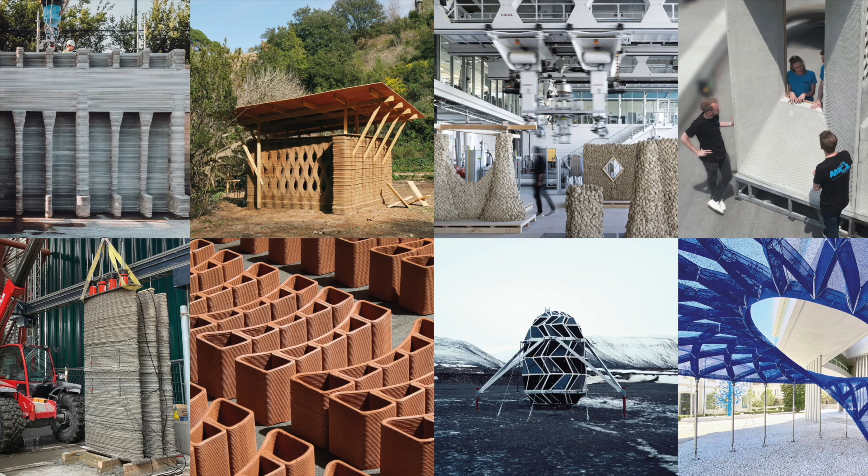Colleague. In 2020, she co-chaired FABRICATE together with Jane Burry, who, by the way, also is here. Jenny is a core member of our community and really a stellar point in keeping our research discourse astute, precise, and critical. Jenny is Arthur L. and Isabel B. Wiesenberger Professor of Architecture at the Department of Architecture in Cornell University, where she runs the Sabin Design Lab, which is in deep connection with her Jenny Sabin studio.

Her work examines how design and emerging technologies can drive new directions for the 21st century architectural practice. She investigates the intersections of architecture and science and applies insights and theories from biology and mathematics to the design of material structures, creating a new ideation of how computational design, data visualization, and digital fabrication can be brought together. She's a key voice in our architectural research community.

She has won multiple esteemed grants from the U.S. National Science Foundation, the National Academy of Engineering, and the Graham Foundation. She is now Vice President, former President of the ACADIA Association. She's the recipient of very important fellowships, including the Pew Arts Fellowship, the Knights Fellowship, and the Architectural League Prize. She has exhibited in leading venues, and her work is included in collections of the Cooper Hewitt, the Smithsonian Design Museum, the Centre Pompidou, and the Frac Center.

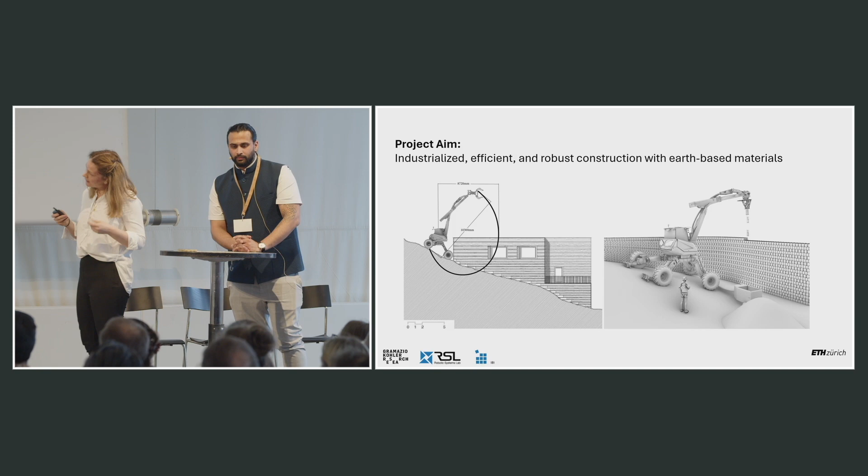So the project was really based on this aim of taking earth-based construction and industrializing it, pushing it to full scale, and pushing it on site. So the goal is to use an autonomous construction machine as one of the ultimate platforms to enable a breakthrough at scale, but also to push the construction speed and the throughput so that we can really facilitate a low cost that will enable us to enter the market.

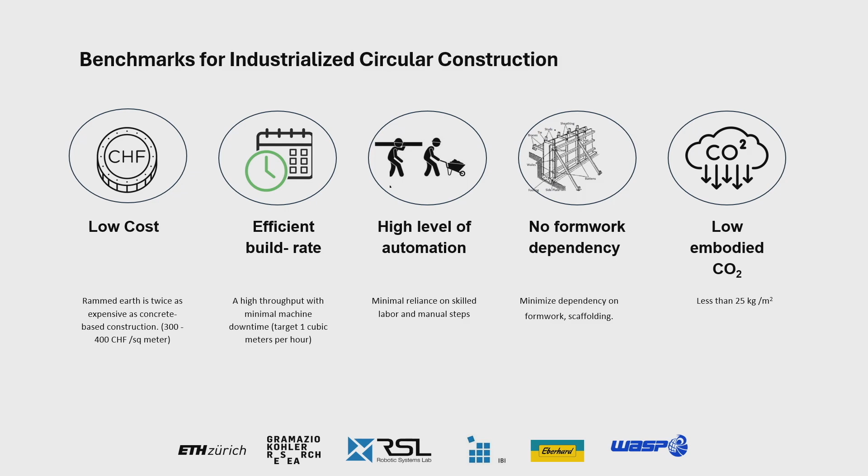So the benchmarks for industrialized construction include: we must consider costs, we have to consider an efficient build rate, we have to consider the parallelization of tasks, we need a high level of automation, especially in Western contexts where the cost of labor is expensive, no formwork dependency, and we need to really think about the additives and whether they compromise the embodied CO2 and the circularity. So we wrote this grant 3 or 4 years ago, so it's super exciting to see it come to fruition now.

We were very lucky to hire Kunal from IAAC to gain a lot of knowledge from 8 years of earth-based building methods. And Ananya is also here in the audience, so if you see him, feel free to ask some questions. But we work also with the Chair for Sustainable Construction. They help us with the material development, and also the Robotic Systems Lab on autonomous robotic systems. WASP has been an industry collaborator on extrusion systems, and with a local construction partner, we're working on a circular mix design and supply chain.

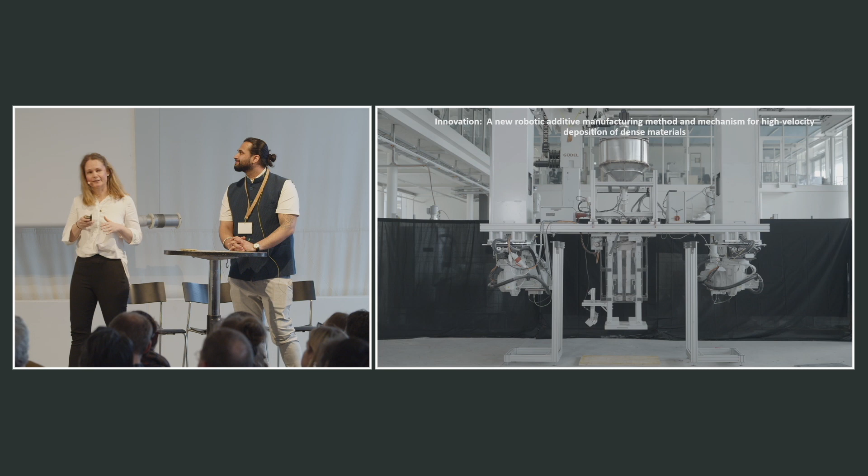So this is maybe not as loud as it could be, but this is our new additive manufacturing method. So we have developed over the last 3 years a completely custom machine. It's obviously very high payload, but basically it takes very high dense material, it portions it, and then it shoots it with a very high velocity. So the velocity is 10 meters per second. And by shooting it at a very high velocity and controlling the velocity, we can actually enable bonding between the parts, even when the part starts with a very, very high yield stress beyond what is pumpable.

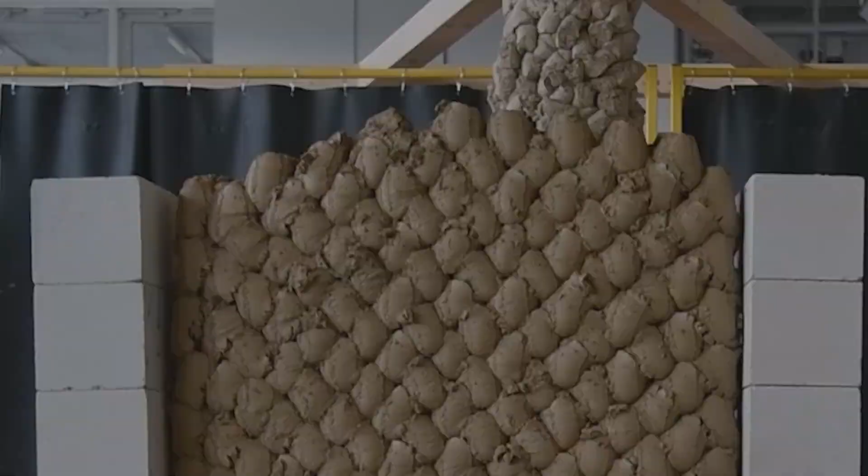And because we're starting with the material in a higher yield stress, and we're building with it, actually what's very exciting is that we have a very high stable height buildup, and we don't need to stop for construction pauses to wait for green strength development. So we've been able to achieve very thin structures, so 0.1 meters in thickness, that are 1.85 meters, that are only built in a few-hour construction session.

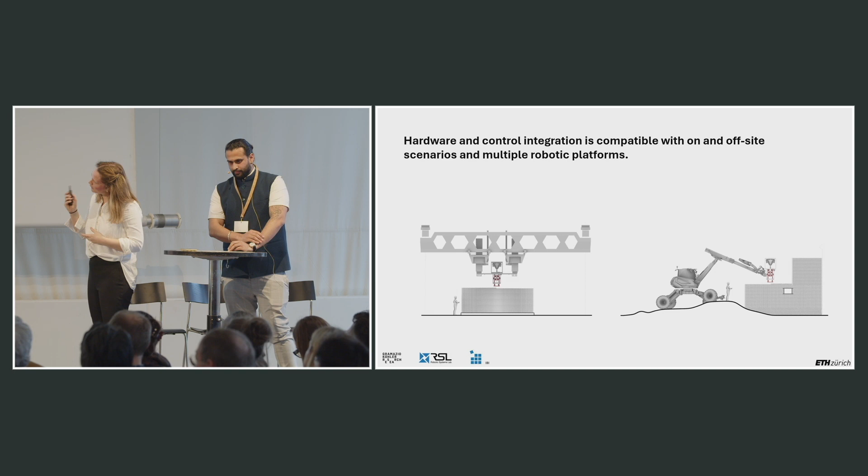And second, for the goal, we really want to develop our whole fabrication process for transitioning it from an off-site fabrication environment, which is very structured, which enables prefabrication, and transition the whole hardware, control, and software to an on-site construction platform. So we're developing everything so that we can ultimately transition it to an on-site autonomous excavator. So now I'm going to pass it over to Kunal, who's going to give you some insight into the paper and the off-site prefabrication. Thank you, Lauren.

So to assess this factory on the fly setup that we have in the prefab off-site scenario, the software or the design and the fabrication workflow was introduced in a studio project at MAS at ETH. There's a small link that you could maybe scan and get more information about. And the focus topic of this studio project was to make embedded timber frames to create architectural openings in impact-printed structures.

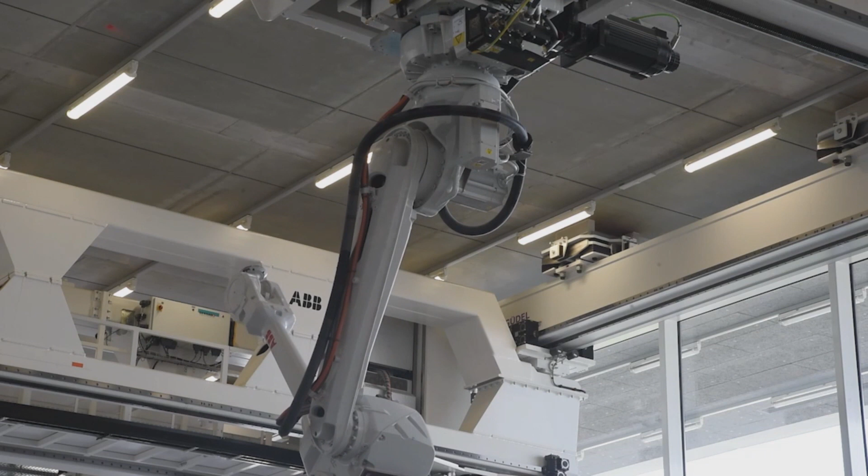As a given, the students were introduced to a set of hardware and software tools developed by the research team. They were introduced to our experimental setup on the prefab configuration, where it has the assembly that you just saw in the video before. It comprises a hopper-based extruder and has a portioning system and then a shooting mechanism which shoots the parts at a very high velocity to have a compaction on impact and hence impact printing. So what we see here is that this end effector then is mounted on a bridge-like structure, which is then manipulated in Cartesian space, synchronously programmed for 2 robotic platforms in a gantry system.

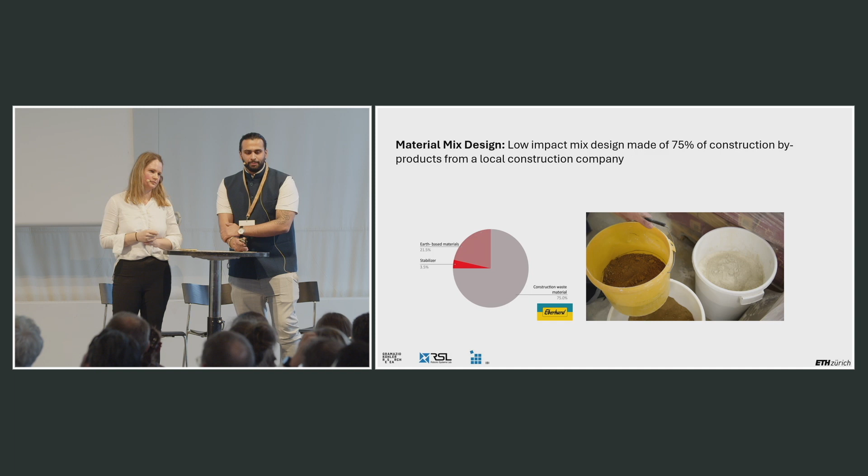The material mix which was used for the studio was a low impact mix developed by the Chair of Sustainable Construction, which comprised mainly 75% of construction byproduct material donated by Eberhard, which is a local construction company in Switzerland. And it's topped up with earth-based materials such as sand aggregates to take the compressive loads, and also clay to enhance the adhesive properties for the process, and minimal amounts of stabilizer.

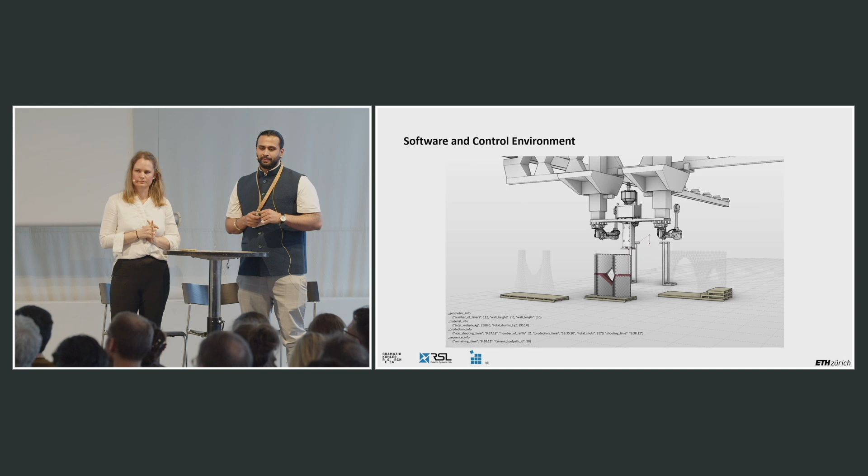To create a robust pipeline from design to fabrication, the students were also introduced to an object-oriented design library, which discretized intended geometries into impact printable trajectories for the operation. And as an addition, the control environment also included, you can see here on the bottom, an insight on the production information. So it gives you a quantitative estimate of materials to be mixed during construction and to plan the logistics around the fabrication process.

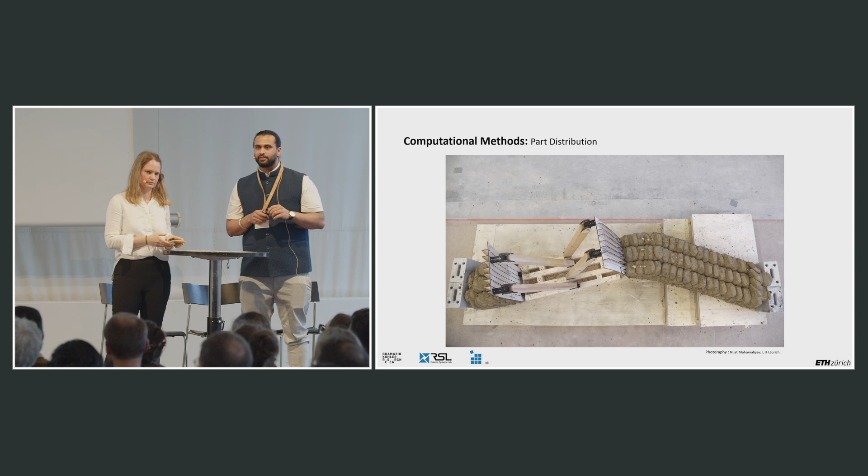So one of the main challenges for the computation methods is to achieve a consistent overlap between the parts, to have an even volumetric buildup, since it's a remote deposition process. Here, maybe it's a bit more evident, but this is a picture showing a part in 3 phases. The one on the left you see is a part when it's extruded, the one in the middle when it's compressed for the shooting process, and the one on the right is when it's shot, which leaves an elliptical footprint, which makes it difficult to achieve this consistent overlap over curvilinear trajectories.

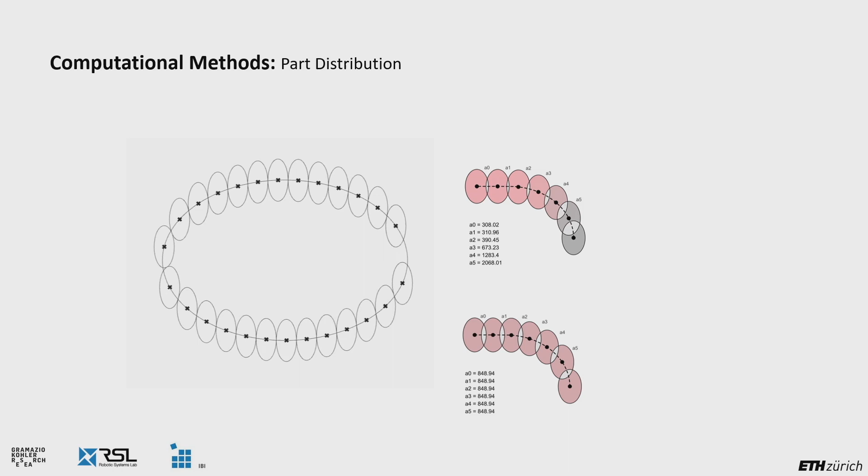Here is the image from the final fabrication of these volumes. It's a column and a wall typology, which uses this algorithm, and which is capped with a roofing element to show the even volumetric buildup achieved with this process.

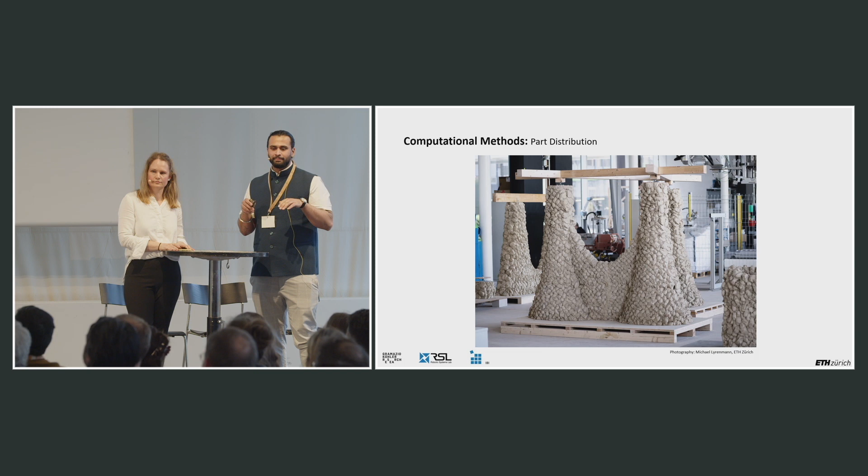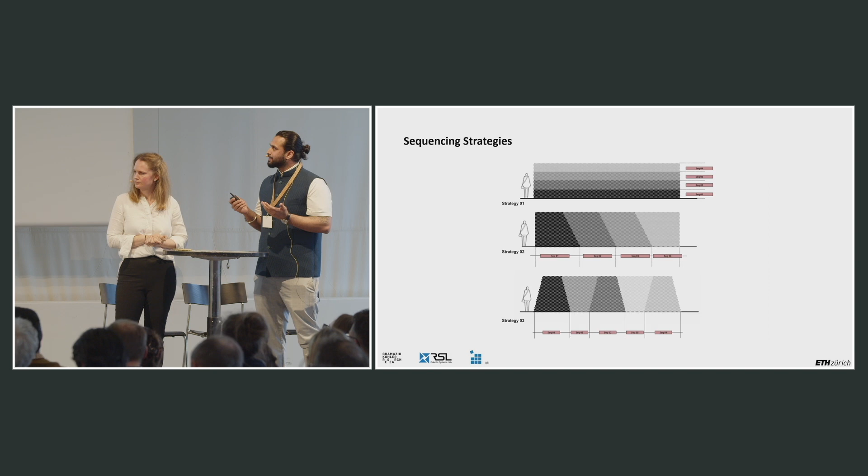Now, in contrast to layer-based additive manufacturing, impact printing allows you to deposit material from a distance. So through testing, we've tried to deposit materials from ranges from 20 centimeters to 2 meters, and this actually allows us a huge opportunity to embed other subsystems into construction, such as windows, doors. What you see on the screen is like a replica of different strategies, that you could sequence one geometry in different ways, depending on a lot of factors related to material curing and construction sequence.

So while it offers these opportunities, there are also some challenges. To embed timber frames, one of the challenges is the placement of the frame, the other one being the adhesion between the frame and the deposited material, and the last being stability because of the impact forces of the process.

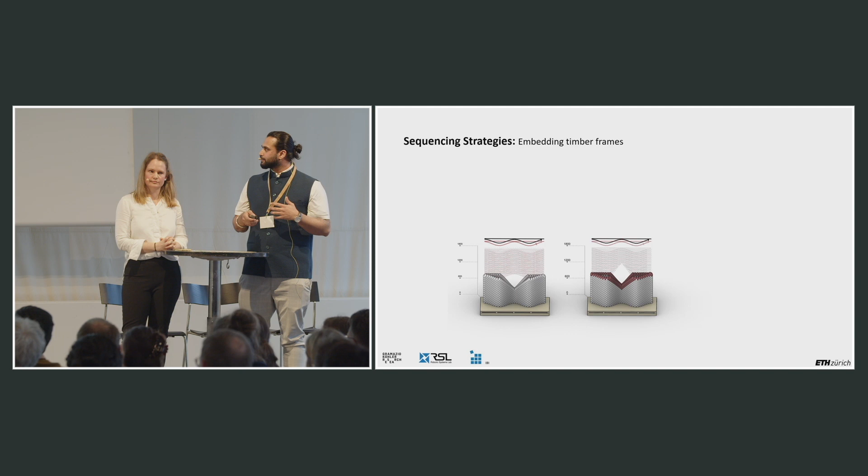So initially, there was a void created in the impact printed volume to physically guide the embedding of the timber frame. And since in most scenarios you cannot construct the whole volume at once, there were separate sequences to always have a fresh layer deposition between the external element and the deposited parts. And then once the timber is embedded, to change the sequence to have a deposition pattern from outside to in to create stability during construction.

Can I say something? Okay.

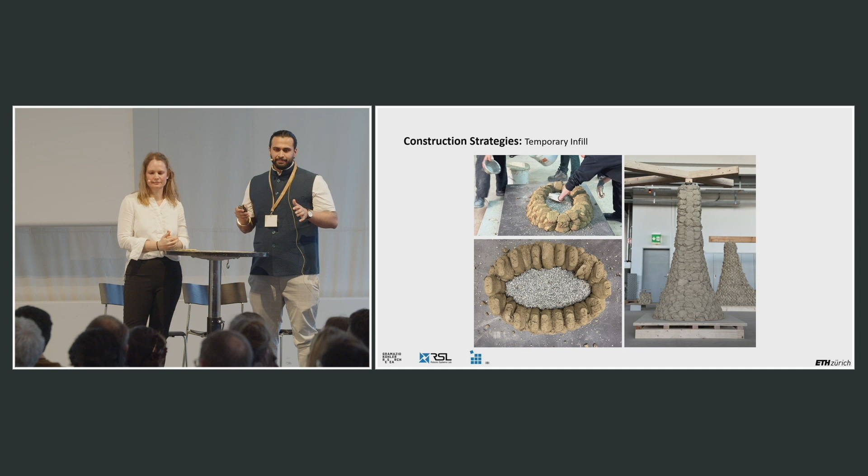The global stability is a factor to consider because of the impact forces, and to tackle this, there were strategies which were developed, described much better in the paper, such as temporary infills to facilitate tapered structures or cantilevered structures, which could be removed after. And with the help of these construction strategies and computation tools, we were able to construct all of these prototypes, which shows potential for impact printing to be a valid AM method for earth-based materials.

We can also think back to our original goals, which is targeting a very efficient construction rate. Right now, our cycle time per part is around 7 seconds. We target to increase that to around 2 seconds per part, which is about 1 cubic meter per hour. And right now, we're actually not always depositing material. We really need to basically develop a complete material processing and feeding pipeline. So this is in our next steps.

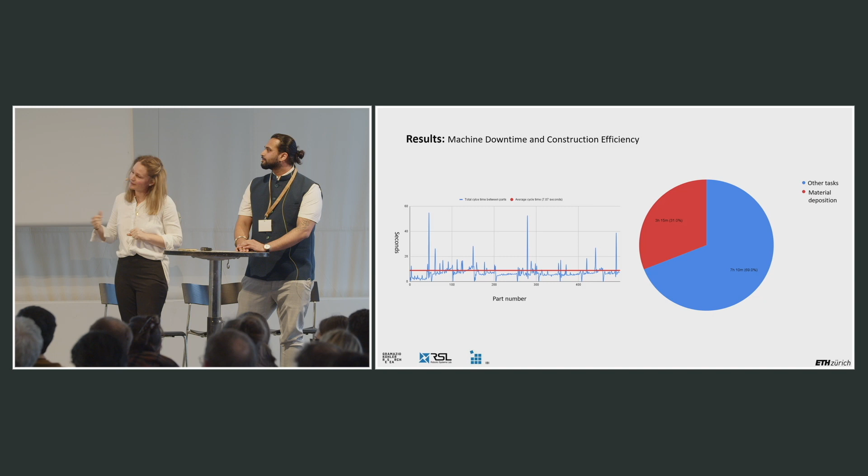And Kunal is going to talk a little bit more about some of the other research outside of the scope of the paper. Yeah, as means to commercialization, we are also looking into robotic finishing strategies. In particular, for my PhD, I'm looking at a novel tamping process, which makes use of the extended workability of the earth-based materials, so that you could tamp it in place, evenly redistribute the material, and have a flat finish.

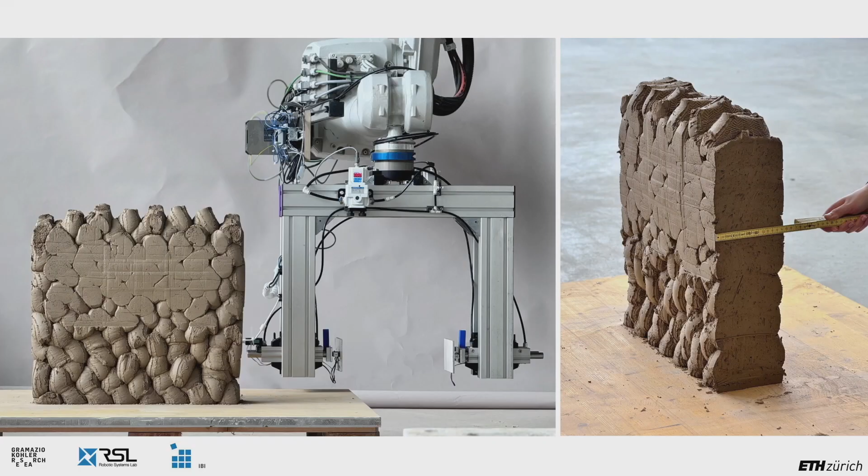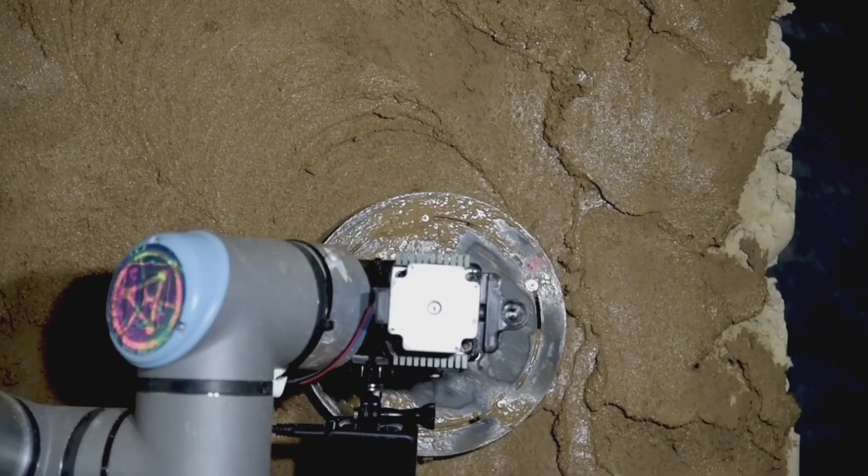Here are some pictures from the first tests, proving that this could work, and then the plan for the next few months is to scale this up. And also in the context of MAS, with two of our master's thesis students, we developed another robotic surface finishing method. First, we acquire the surface geometry because it's very textured, and then we use a compliant robotic surface finishing tool to apply a clay-based plaster on the surface.

And this gives us a lot of processing possibilities because we can basically take a very cheap infill material, and we can use a very fine, high-quality material on the outside, and we can manipulate the vapor permeability or the durability by changing the surface coating. And finally, we're super excited to announce that we integrated our tool also on the autonomous excavator, which was developed by our partners, the Robotic Systems Lab.

We've successfully built a 3-meter tall demonstrator. We're really excited to publish it and release it in the future. And we've also gotten SNSF bridge funding to actually commercialize and take it into industry. So we're moving towards establishing a startup. ChatGPT has not been very successful for us in coming up with a startup name.

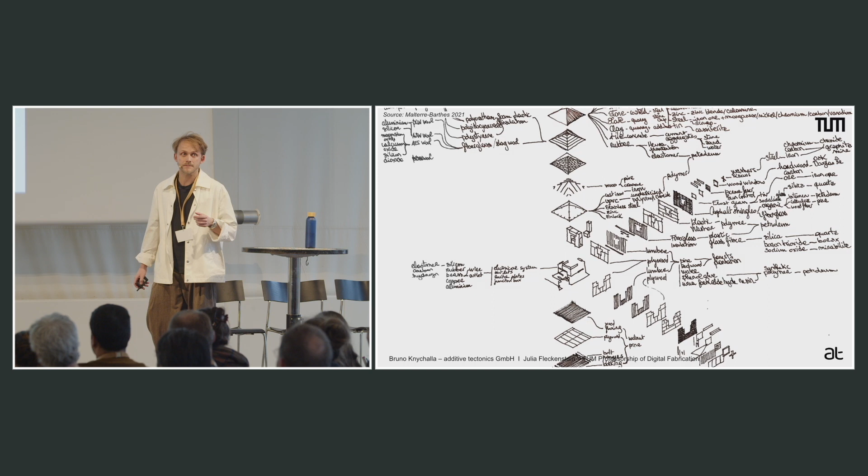Currently, we are dealing with the increase of advanced building systems to achieve ever-improving standards of comfort and living in buildings. But those buildings usually rely on a very complex array of materials that are mostly glued together. Research at the TU Munich has already shown that you can also do this in a monolithic and monomaterial approach. This is an example called Einfach bauen by Professor Florian Nagler. It works in different materials.

The prototypical house that you see here, its envelope is composed of one monolithic material, which is here infra lightweight concrete. The lifespan is based basically on this monomaterial, and it's easily recyclable because we just use one material, nothing is glued together, and it's done in one construction process. But to specifically integrate certain building functions can be tough in a building system like this.

Pioneer architects like Marcel Breuer already envisioned multifunctional hybrid facade systems, building envelopes. In this image, you can see the IBM Research Center in La Gaude, France, which is the base model of our research. Breuer synthesized mainly three building functions: building services, installation, and passive solar control in one modular piece.

But because of the fabrication technologies of that time, of course, these building elements are all self-similar, or basically the same. So we envision a strategy where we can make one simply built, einfach bauen, monolithic building system, but in a multifunctional way. And we think by using additive manufacturing, we can integrate multiple functions into a monomaterial system and basically increase the lifespan, making it more durable and easier to disassemble.

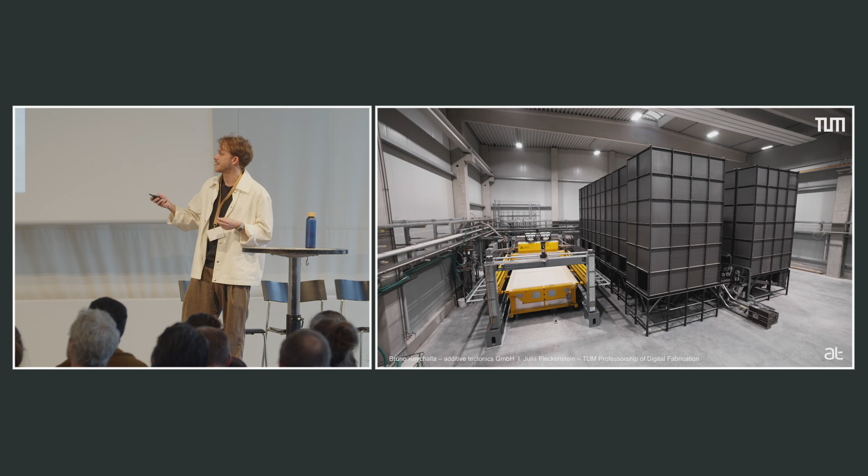So aggregate and binder are in the powder bed, and just the activator is jetted. Here you see it. While in binder jetting, you basically jet the binder. So this is our big future factory at Additive Tectonics. Here we developed a process.

We basically scaled up the process to a machine that can hold 10 cubic meters. And this machine can print these 10 cubic meters in around 5 hours, which means that we can produce at the speed of 2 cubic meters per hour. And it also works with construction material. And with the ability to use construction material and these speeds, we believe that we are ready for the construction industry with particle bed additive manufacturing.

We developed a completely new material for this because we knew we wanted to have a functioning prototype. So it's based on ordinary Portland cement, and we needed to print a very big part for the first time. The material that we developed had the density of 1,000 kilograms per cubic meter, and the rest of the material properties point in the direction of infra-lightweight concrete, which meant that probably the insulation properties were very good.

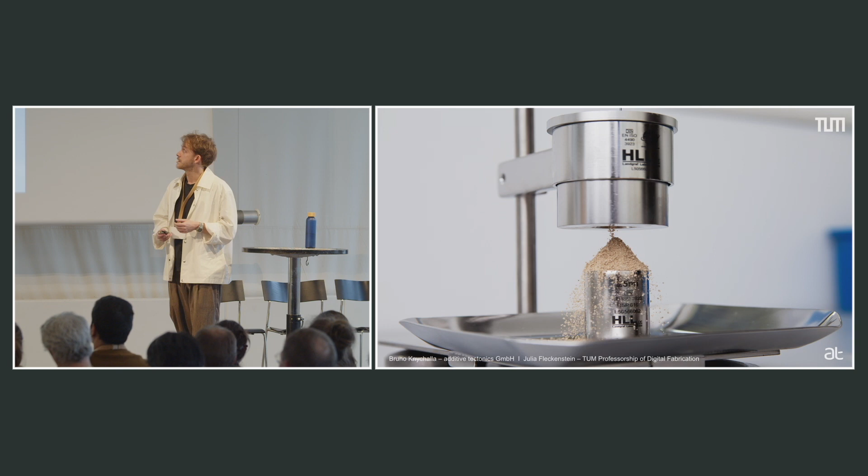We used recycled glass as aggregates from bottles from a local provider, just 5 kilometers away from my company, and 70% of the volume inside this material is basically this aggregate. These recycled bottles get expanded and granulated into different sized spheres. And we need these different sizes to generate a nice packing density. And then the Portland cement is added, and also cellulose.

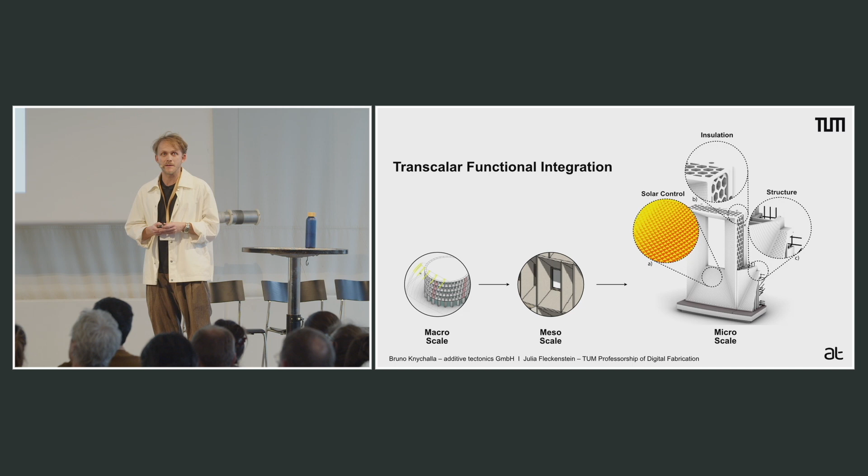We wanted to have a fabrication-aware design methodology, so the elements are not just designed for our manufacturing strategy, but also for all of the periphery processes like unpacking and material handling. The design was being done on 3 different scales, while the micro scale was mostly used to integrate most of the functions. In the mesoscale, graphical methods were applied to define the shape of each element. Basically, it defined the position of the glazed area for the different directions.

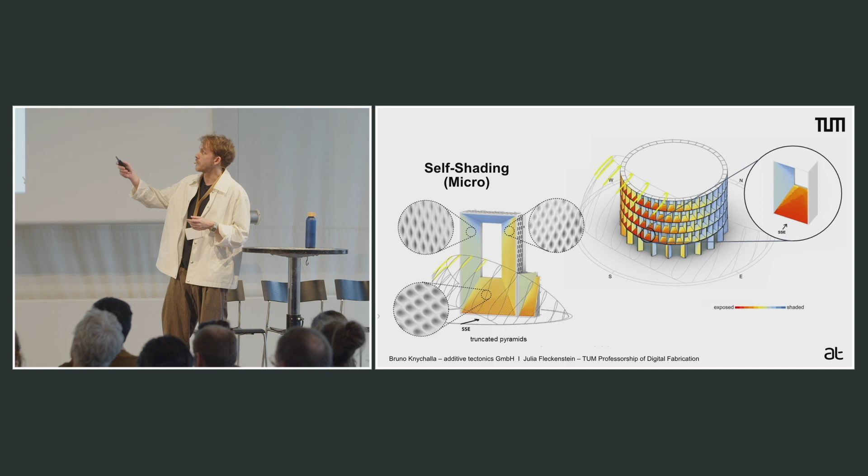And after solar radiation simulation, we would map a microstructure on top of the surface of the element to basically generate a self-shading on the part, which is more vertical on the east and west side and more horizontal on the south side. Together with the solar control strategies, also structural and thermal functions were integrated. We divided the structural and thermal requirements into 2 zones. Furthermore, dry joints were integrated to attach the elements together later.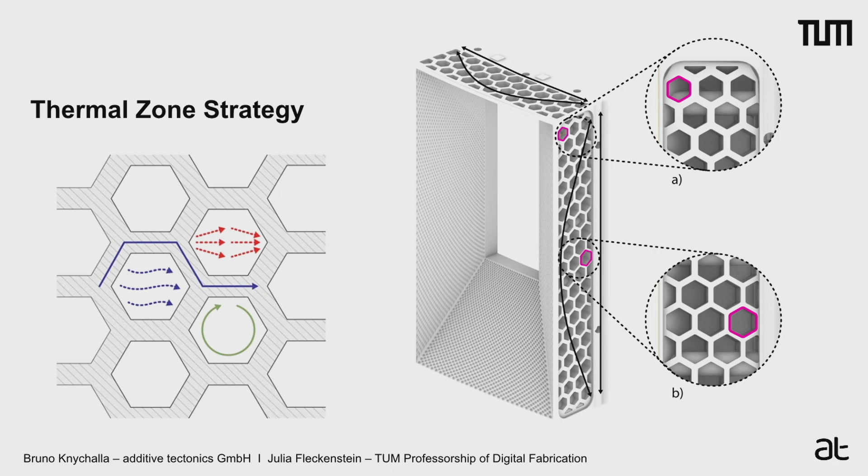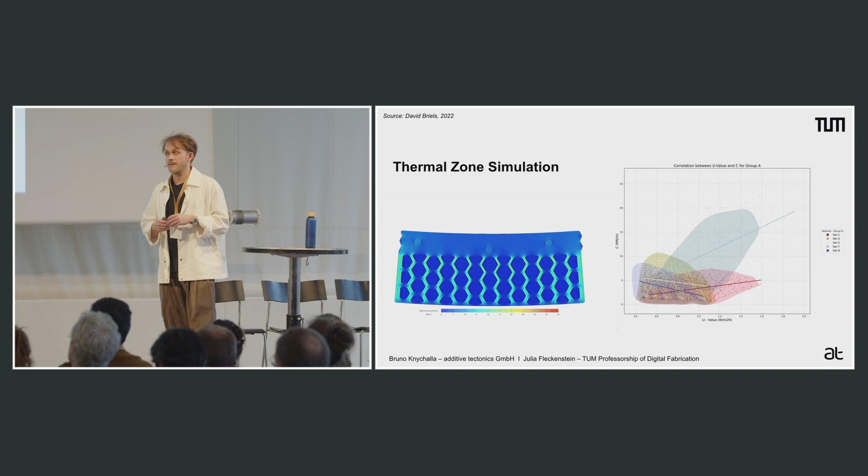For the thermal zone strategy, we basically analyzed different cell geometries for the thermal performance in 3 categories. Radiation you can see as red, convection in green, and heat flow in blue. The cells vary in size and thickness throughout each element and are thicker where more stress is expected. We did FEA analysis for heat transfer, and different cell families were compared, basically for the compressive strength and for the U value, and we chose a family of cells that would integrate nicely also with our fabrication parameters.

For the structural zone, we had to plan in reinforced concrete, which also interfaced with the 3D printed element through teeth, and also interfaced to the dry joints structurally. Of course, we wanted actually to avoid a second material system. We'll talk about this later. The building envelope was fabricated horizontally and filled our printing setup in each dimension around 75%. And it was the biggest part that we printed by then. And you can also see how deep the insulation channels go.

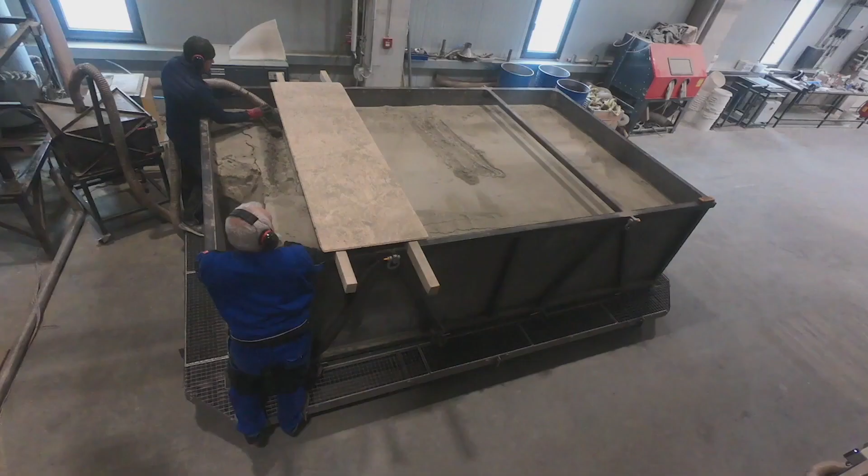Here you see the printing process. It took us this time 9 hours. We know we can also do this faster, but as it was a new material system, we had to stop sometimes. Basically, water is just jetted and activated. Here you see the unpacking step. This will soon be automated. The print is here still in a green state and can only be transferred with the print box that we also use to lift the print outside of the machine after the print has finished.

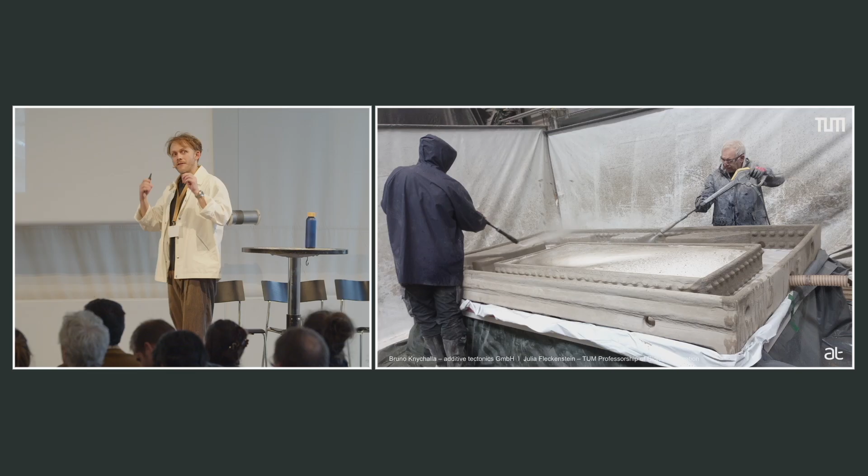Now comes a very crucial step. Until here, we basically have an underhydrated cement. The cement is 30% underhydrated, and we need this because otherwise, when we print with full water, the water would leak through the layers, which would mean that the print would bleed. And also, if the whole part would be activated, like all of the cement, it would shrink, and the powder bed would prevent the shrinking, and then it would lead to the cracking of the part. So here we not just clean it, but also hydrate it.

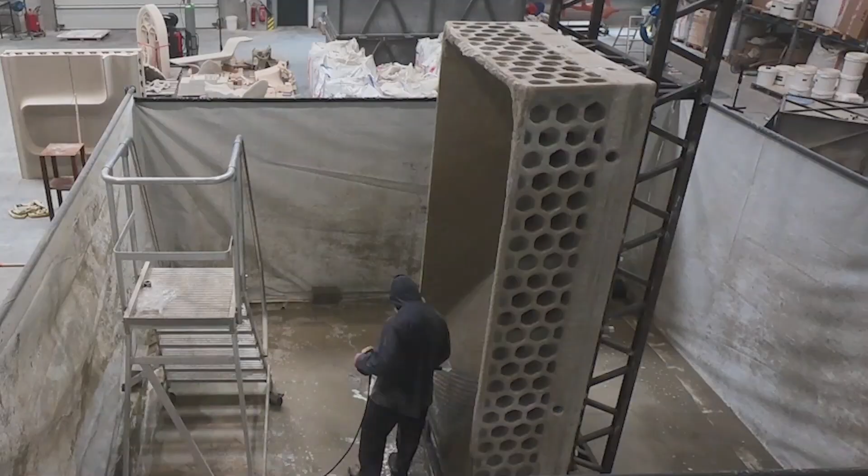Then the rebar is being put in, and grouted mortar is filled. And after 1 day, you can start to lift the part by itself. Then the part needs to be turned, and the front side is still not fully hydrated, so this is a game against time. If it wouldn't get hydrated, it would also crack. So it's a delicate play of when to put water where.

Yeah, but it didn't crack so much. And here you can see the inside of the part. Basically, this you would see from the inside of the building. And here you can see the outside of the finished element. You can also see the thermal zone here.

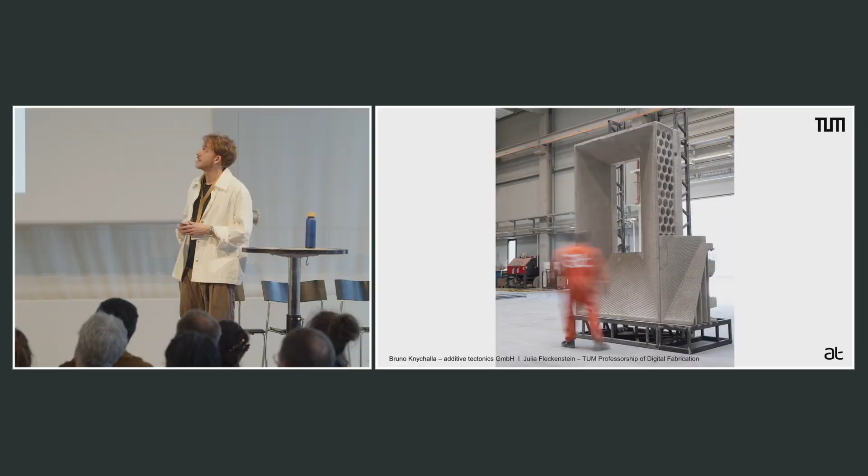And we also fabricated a smaller part next to it to see the tolerances and to basically see how well the dry joints would work. For my conclusion and for the future outlook, I will separate it again in these 4 points that I discussed before.

Firstly, the surface measurements were very successful. The self-shading behavior worked quite nicely and showed very promising results. But these measurements should be applied for the whole cross-section and not just for the surface to see how the heat actually transfers through the element.

Secondly, we basically had to integrate blow-in insulation that we already knew from the thermal simulation. This had multiple reasons. One reason was the solid structural zone in the back, the varying geometries of the window, but also our fabrication constraints that come from unpacking. So the part at one point was actually designed to be for blow-in insulation. We also used the blow-in insulation because we wanted to achieve passive house standard in the German standardization.

A future way to solve this issue would be to trap loose particles inside the element during the printing process. In 3D printing terminology, this is called powder trapping or particle trapping. And this process is basically like a blow-in insulation, and we can achieve this by slightly changing our fabrication parameters.

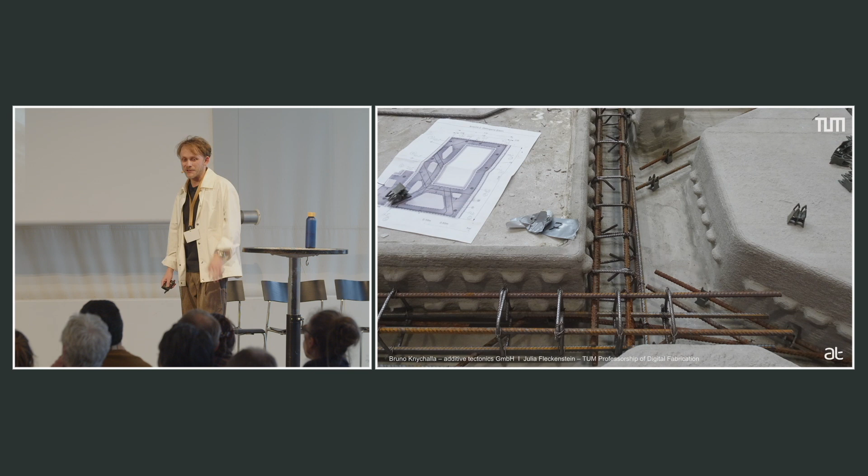Of course, we didn't want to use reinforced concrete. We should avoid this in future iterations, but you know how these projects work. Not everything goes streamlined, and also if you integrate, you have a lot of different functions that you have to integrate. But a promising solution for this is design for material separability. And a system like this, I think, can be easily imagined. And I think we can also see some very interesting post-tension systems in some other talks today.

Finally, cracking. We have 3 different types of cracking: hydration, shrinking, and part handling. Hydration and shrinking actually come from the same root. Both are based on the behavior of cement. If we use larger particles, we need less cement inside our parts, which means we have less cement that will shrink and that will also dry out. So by using a bit larger particles, I think we can handle these problems quite nicely.

For the part handling cracks, it would be necessary or nice to integrate fibrous materials. For example, like in our novel material, which is called EcoNeat wood, we use fibers from residual wood waste. And if you're interested in the developments that we do on wood 3D printing in powder bed systems, you can scan the code. We will reveal this material next week at the Milano Design Week.

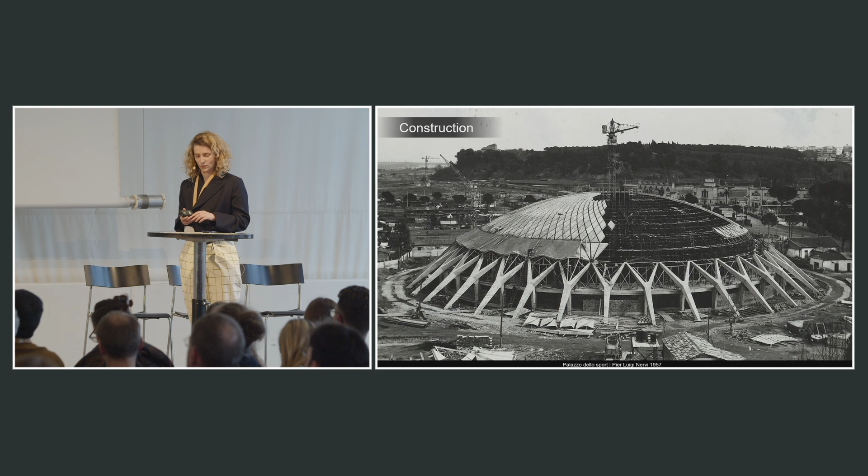Unfortunately, when we look at how these structures are constructed, although pioneers have looked into how we could do this rather beautifully, elegantly, and efficiently, we find a question of complex formworks that are difficult to manufacture and usually hinder the adoption of such structures in construction nowadays.

As I mentioned, through that heritage, we usually look towards the past and towards master builders who were intelligent in how they designed their structures. And that's where this particular pavilion comes in, to showcase a particular way of constructing concrete structures with a lightweight, flexible formwork, as opposed to the usual traditional formwork technologies.

In this particular case, the flexible formwork uses a knitted textile, and the way that works, as shown in other projects, is by manufacturing a knitted textile, tensioning that into shape, coating it with a thin cement paste or not, depending on the project, and using that to cast concrete. And once that concrete is cured, the frame that was used to tension this type of formwork can be removed and the structure can be revealed.

Now, although this usually does mean that there's a significant reduction in formwork materials and the waste associated with that, we still need quite a lot of framework or means of tensioning these textiles into shape. So we tried to make a further step, an evolution of that type of system, in which we would not rely as much on external non-reusable frames.

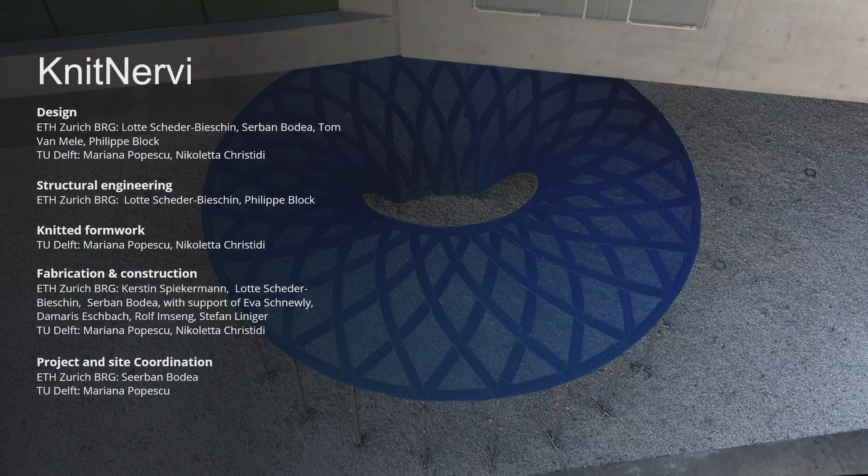Now, as the name might suggest, KNITNERVI is inspired by the works of Pierluigi Nervi, and particularly by the Palazzetto dello Sport, because it was built at the MAXXI Museum in Rome, roughly a couple of hundred meters from this beautiful structure, the ribbed dome of the Palazzetto dello Sport. So it takes inspiration from that structure, and tries to come a little closer to something that industry might recognize as implementable, having reinforcement cages and geometries that are a little more recognizable than purely doubly curved shell structures.

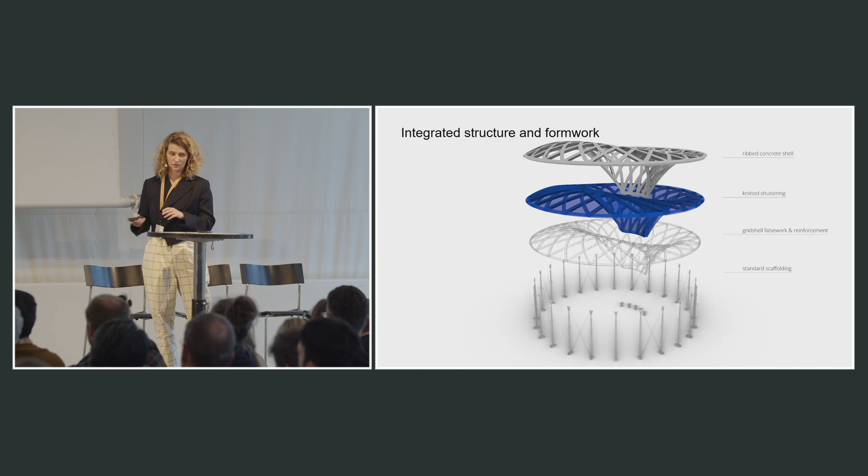In this case, and you'll see here how that gridshell was set up, what we set out to do is have an integrated structure and formwork system whereby the bending active rebar cages that are built up as a scaffold for the knitted shuttering become an integrated part of the structure once concrete is cast, thereby avoiding the need for any other non-reusable tensioning components. The only components that would not be part of the structure are the pillars you see at the bottom, which are used during construction, but those are standard construction props that might be used in any other type of construction afterwards.

Now, as a disclaimer before we go forward, because you've seen it on all of the other images as well, we haven't actually cast concrete in this structure, but we have used it as a showcase for how a lightweight formwork with integrated structure can be added to it.

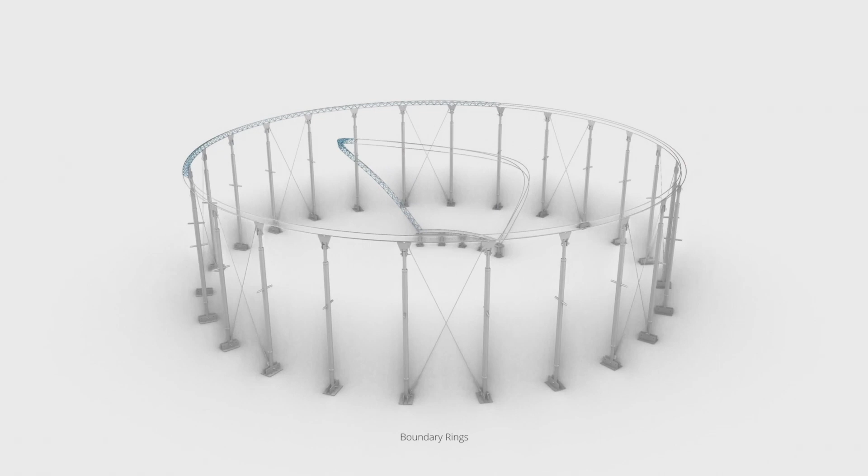The process started with a form finding process to get our general geometry for the bending active splines. It looks something like this. That geometry inverts the system of the dome by bringing a tension ring up and having the diagrid formed by splines in two directions overlapping each other. These are actually in a triangular section connected by stirrups, and those are then used with 3D printed profiles to hold up the knitted shuttering outside of them.

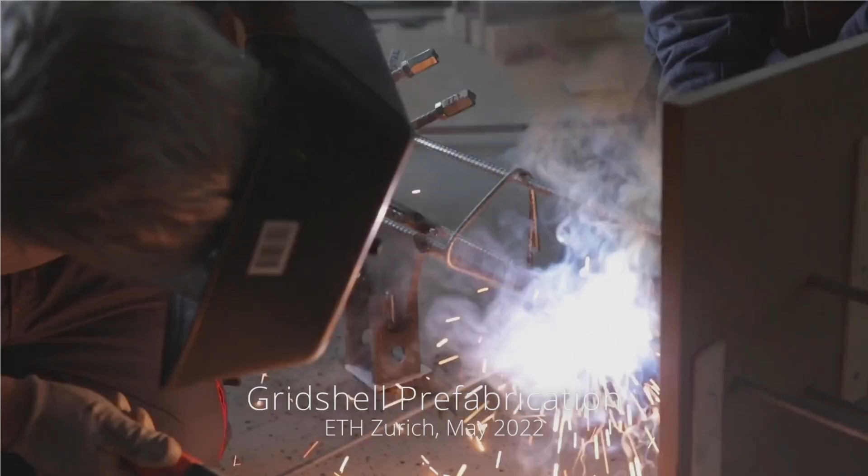Okay, that's it. The construction stage was done in two big chunks, let's say. First, the prefabrication and the construction of the grid shell. Part of this was prefabricated in Zurich, like the rings, the inner and the outer ring. These were then transported to site and easily assembled as a kit of parts with construction workers, so actually in a context where we as researchers don't necessarily do all of the work.

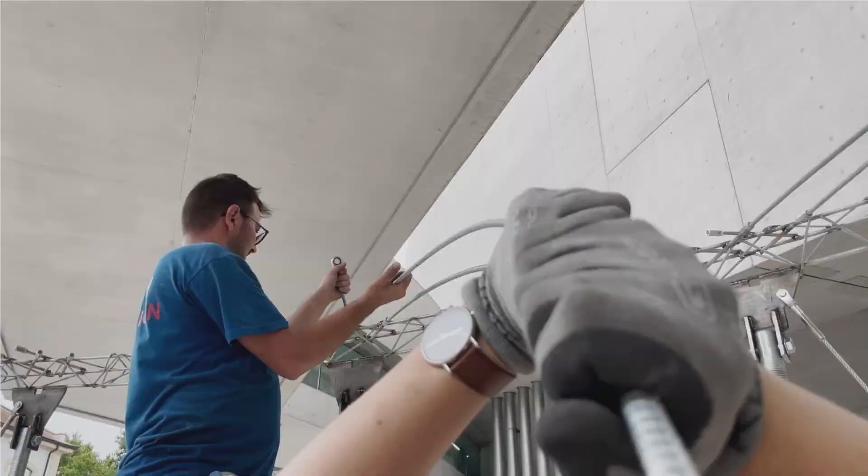And you'll see here how those splines are being added in clockwise and counterclockwise direction to the structure, and then tied together to form the rebar cage that is a grid shell. Now, part of this is also making sure that we reach the geometry that we want, very carefully measuring all of the intersection points. And you would have seen Lotte, the one that has actually designed and calculated the grid shell, carefully checking that everything is placed exactly where it should be.

So in our first stage, we had this structural grid shell that becomes reinforcement within the structure. And we took advantage of the fact that we have a little bit of time and decided to take that time to measure the constructed geometry such that we can build a fitting textile, not for the original design, but for the measured structure, because we had a computational pipeline that allowed us to do this relatively fast, meaning that we didn't need to start production in parallel with having built the previous structure.

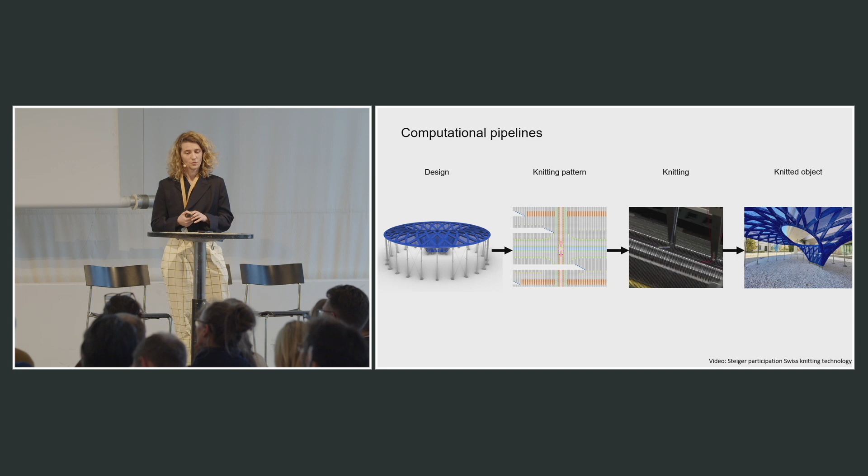I'm going to focus most of the presentation on the computational pipelines for the knitted textile, because the project doesn't only deal with global geometry, so having that architectural or structurally informed geometry that allows us to reduce raw material use and perhaps reuse, and I can talk about that because we haven't cast it, but also about local geometry and how we might be able to control the material properties locally on that textile, which allows us to introduce functionality and architectural expression in certain places.

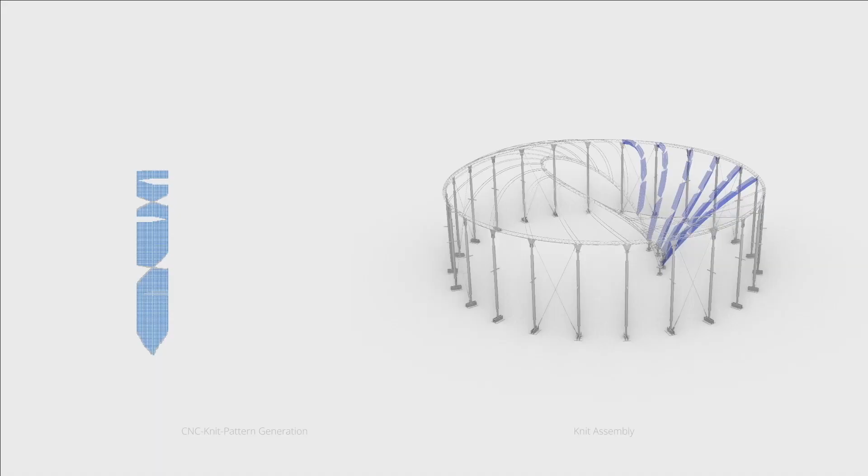So what you'll see here is a more or less zoomed in or detailed picture of the textile as it was assembled. And what you might notice, besides the X-ray view through the structure where we can see the rebar cage, is that the diagrids in between, which were not meant to be structural or cast in concrete, have a very specific texture with different densities that can be manipulated and controlled during production. Now, to do this, we segmented the geometry in 74 parts. This was for production purposes, but also for being able to generate the production files accordingly, because it entails some computational weight in case the pieces are too big.

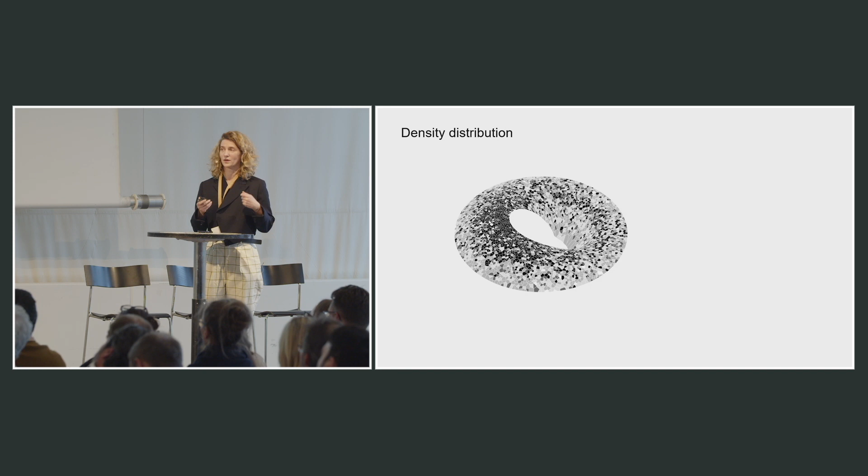To decide on the density or the porosity and the expression of our membrane, we started with a density distribution of where we wanted to have a more closed and more open expression, and divided that into different zones that would then control the amount of openings that we use on that particular side. That was also superimposed on the ribs that you see there, and for each one of the parts, a knitting pattern is generated on a 3D surface, which entails the generation of about 30,000 points for each one of those strips. So having 74 strips gives you the idea of the magnitude of the computational step that needs to be done in this case.

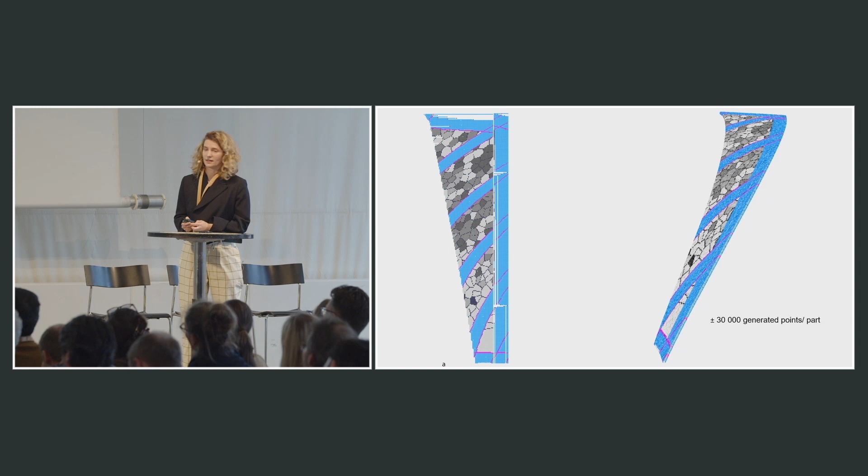Now, each one of those points that you see in the 2D representation of the pattern represents a grid of 4x4, so it actually represents 16 units within the fabrication file, which has specific operations that allow us to introduce that porosity. That means that in the end, in terms of production, that's about 500,000 points that we needed to generate, which means that we needed to have a post-processing step directly on a bitmap.

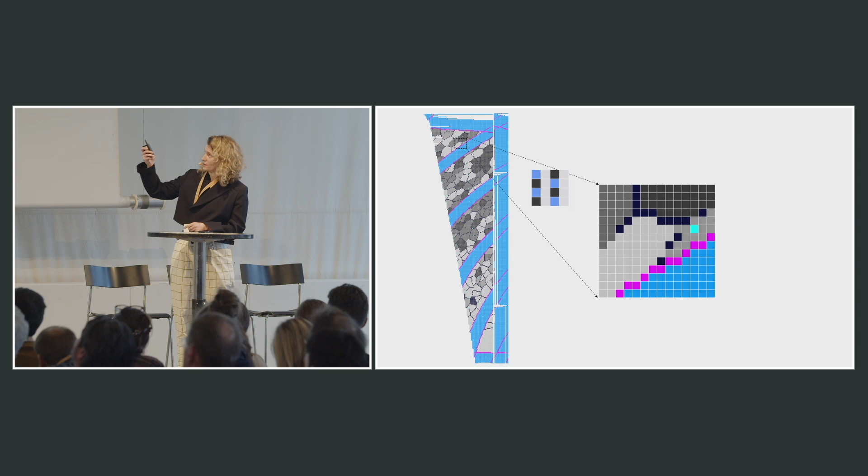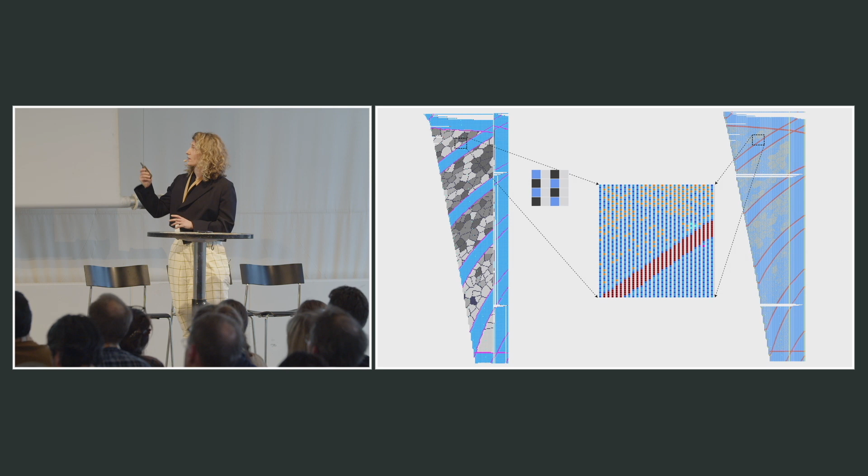So each one of those little pixels you see there that turns into those 16 comes from a piece like this that then gets processed into a bitmap that looks a little bit like that. And this is then further processed to add those densities based on our color gradient, so our darker or lighter shades of gray, to have those openings within it. And what we are left with in the end are all of the instructions that we need for the machine that have all of the different operations in exactly the right place.

So for the second step, those instructions are fed to the knitting machine so that it can produce those 74 pieces that very conveniently and lightly still fit within a bag. Oh, that stopped at the wrong place. But there was a bag at the end of it, I promise.

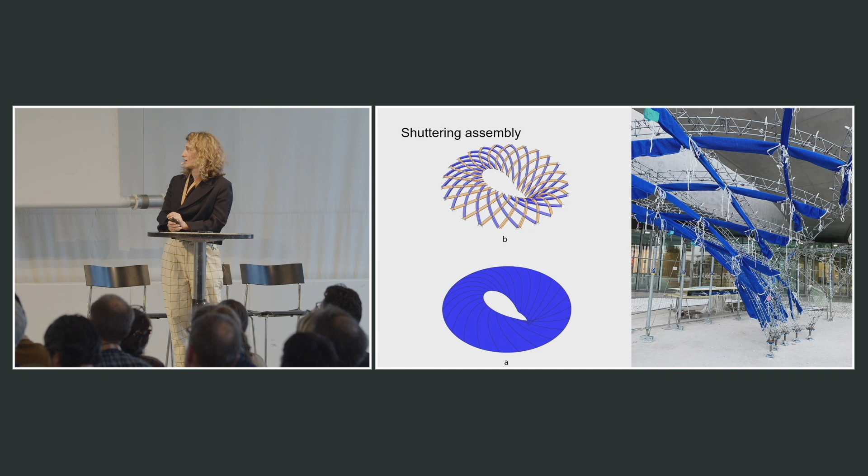And we went on site in Rome, where we found our beautiful steel structure, and we started off by hanging the ribs that were to form the clockwise and counterclockwise direction, and then slowly start putting also the top surfaces on. So you'll see that this is not necessarily a completely sequential process, so we can do some of these steps at the same time.

They don't require very specialized skills, sometimes just one person on a scaffold, with unskilled labor at that, that can put together this kind of lightweight system that ends up in this. I have here a few impressions of the project once it's realized, and what you'll see is that by not casting concrete, we made a lighter textile that gave the visitors an opportunity to have an X-ray through the structure, so understand how a concrete structure might work.

But we also took the opportunity to make it completely demountable, or look at the possibility of having that demountable. It has been demounted, it has not been reassembled anywhere else, and probably can't be. But we did have that intention to have it completely demountable.

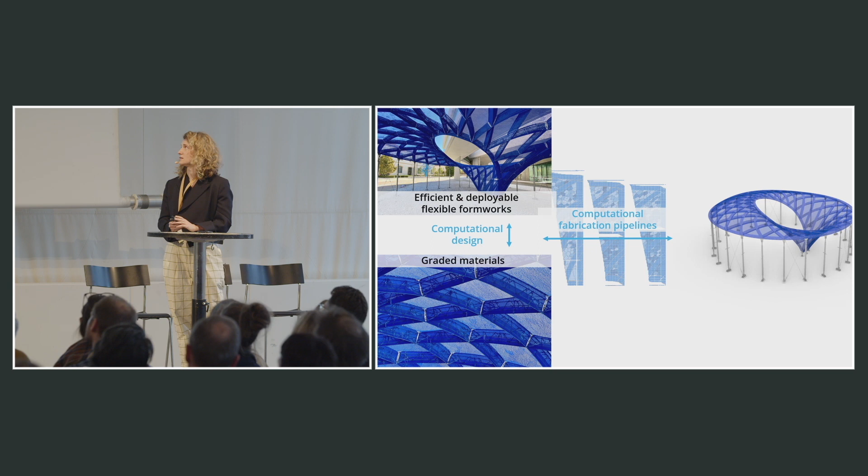Finally, what we need for that basically is to have, on the one side, the possibility to create these types of efficient deployable formworks, both at the global geometry level, but also graded materials. And we need for that both computational design, but also computational fabrication pipelines. And these need to be scalable ones, because if we start from the first prototype that was about 50 square meters, this one looks smaller, but it is roughly 3 times the size.

And because I keep finding myself roughly every 3 years somewhere on a scaffold pretending to be a construction worker, roughly every 3 years the surface area also increases by 3. So yesterday I came in from Bruges, so I'm going to leave that out just as the last thing, where these types of computational pipelines helped us generate something that is 370 square meters in the same amount of time that it originally took to generate that for the KnitCandela.

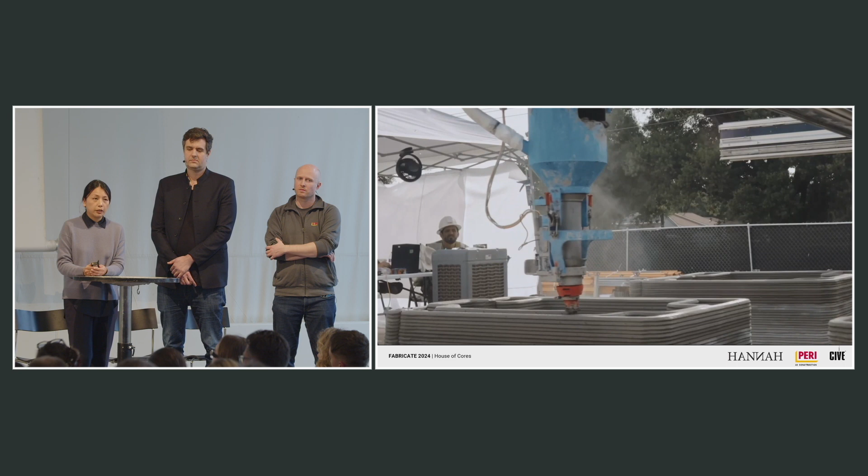And so for us, the House of Cores illustrates the possibilities and current challenges of in situ 3D construction printing technology, mass customization, and design solutions that integrate conventional construction methods. So this project served as an active testing ground for us, where we looked at 3D printing process and logistic optimization, material sustainability evolution, innovations in design and mass customization, as well as a mix of on-site and off-site 3D printed construction, combining with hybrid structural innovation and integrating the various associated trades, and most importantly, permitting and on-site inspection schedules for a residential building in the city of Houston.

And so first, where we start was we were looking to respond to the residential building practices in the United States. House of Cores is designed as a hybrid material structure of concrete and timber framing, establishing a flexible construction system that can be readily adapted to multifamily housing in the US market.

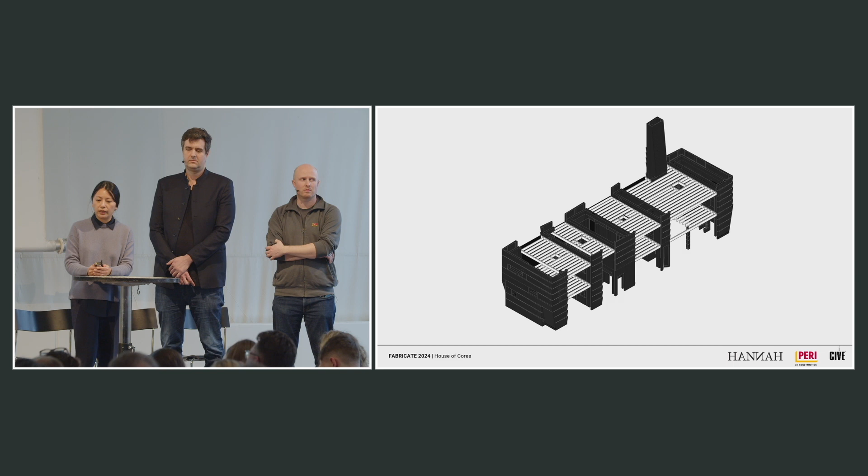The main spatial organization principle here establishes a series of 3D printed load-bearing cores connected by lightweight wood framing for floor, ceiling, and non-load-bearing wall assemblies. And as you can see in this plan here, the printed cores, essentially there are 5 of them, contain functional aspects such as bathrooms, storage, staircase, HVAC rooms, seating nooks, and so on and so forth.

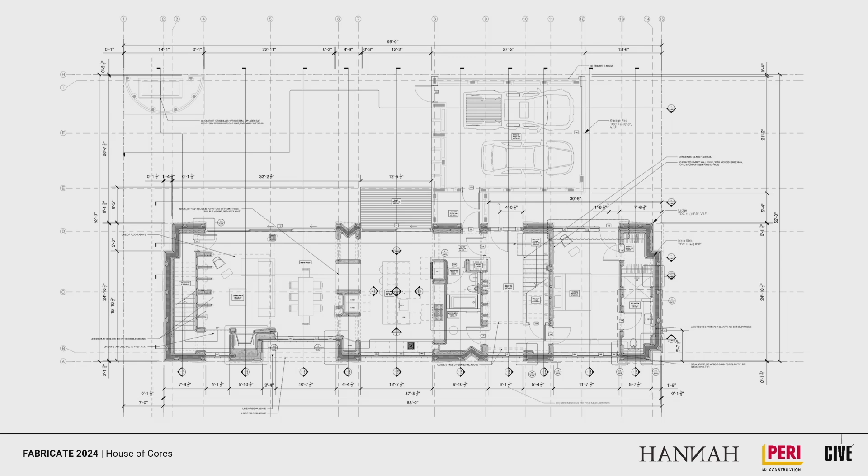And between the printed cores and the framed walls is to generate an architectural and spatial alternation of concrete and wood walls with glazed infills, bringing in the mixture of light and heavy materials.

And so the printing process is familiar to most here in this audience. It is, as we know, a delicate balance of rheological parameters, material compositions, printing speeds, layer times, flow rates, and environmental factors such as the blistering heat in Houston, Texas, which in one summer, I believe, ranged from 38 degrees Celsius to 42 degrees Celsius.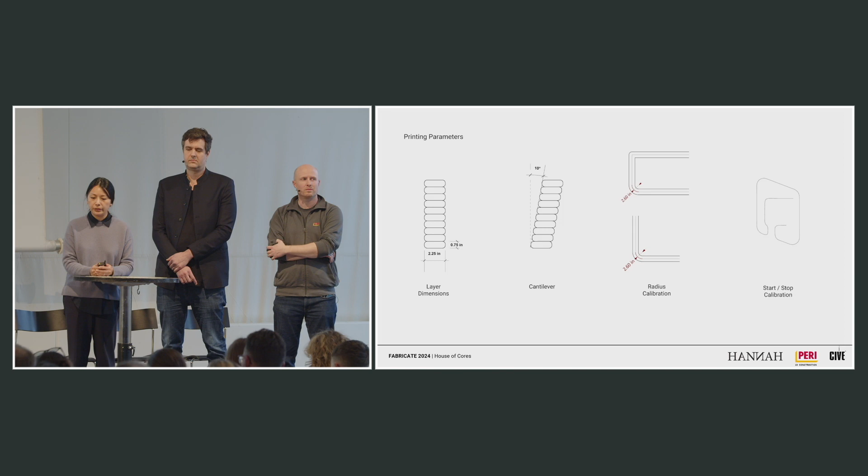And so key parameters for our project consisted of a layer height of, because we're in the US, 0.75 inch tall and a layer width of 2.25 to 2.5 inch, a maximum cantilever angle of 10 degrees, and dilating corner radii between 3 inch to 5 inch. And also using the centerline tool path calibration for start-stop positions during the printing process.

And so for us, balancing the tool paths and the printing parameters on how the line begins and how it ends and this radius turns into a feedback loop between design refinement and on-site test printing. While we all know that the filleted corners and larger radii are easier and faster to print, they can present challenges for connections and the integration of other building systems.

So as a result, the project back and forth was very much a constant negotiation between the machine's technical means and the project's architectural ends. And you can see here on the interior, we highlight the design potential of mass customization of architectural components through its programmatic nooks and filleted undulations to create a spatial sequence of concrete thresholds.

And the layers of softly curving concrete reveal different customized storage spaces, lightings, vessels, and also bookshelves later on for the building's users. On the exterior, the facade of the 3D printed wall is prominently characterized by a series of small steppings. These are 10-degree cantilevers that seek to break down the massing and the volumetric shifts of the concrete walls through this gentle corbelling.

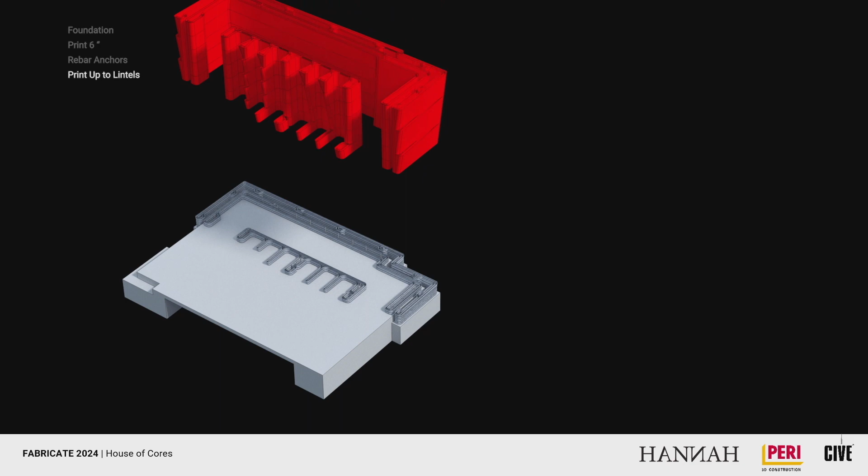So to develop a permittable residential building, our team had to collaborate and develop integrated detailing solutions that enable the interface of various systems, taking into account construction sequencing during printing, the integration of trades, inspection schedules, and the printing process itself. And so in this animation, you see the sequencing and steps necessary to execute the project from the foundation, to the concrete rods that get into the foundation, up to the second story.

So here you see the various rebar systems that we had to develop for the project. So there are rebar cages for bond beams and bond columns that were inserted after the printing process of the first level concluded. There's an inner and outer shell that's connected by U-ties, and within some of the cavities of the concrete infill wall, electrical systems are embedded into the system itself.

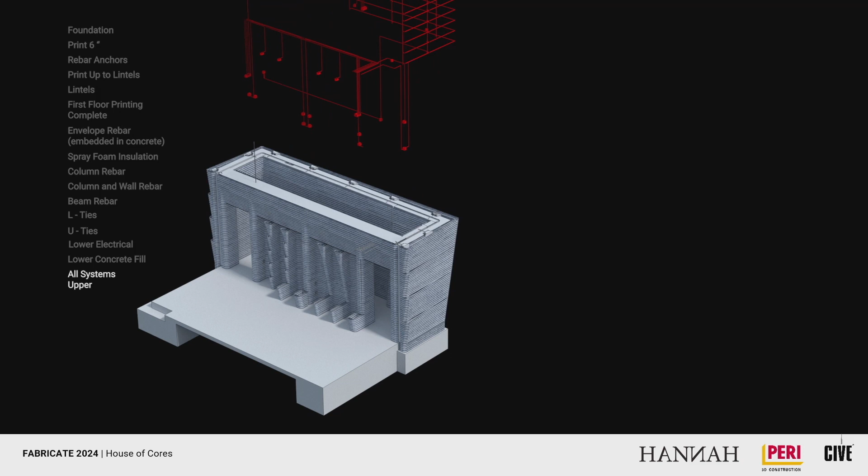And because it's a two-story project, we had to also carefully think about how we make load transfers possible by printing on top of these bond beams and bond columns. And the system essentially repeats on the upper floor and tops out with a parapet.

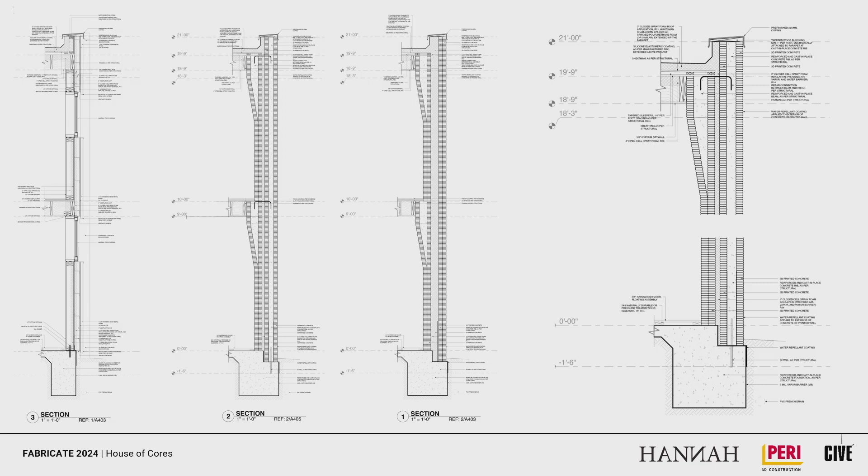So the project developed three typical wall types using mainly 3D printed double layer wall systems with insulation cavities and integrated bond beams. The second section shows the 3D printed double layers with the reinforced and cast in place concrete. And then the exterior layer, as you can see on the right, connected with U-ties, inverted U-shaped rebars, to each other, as well as to the foundation.

One of the biggest challenges of 3D printed projects is the integration of reinforcement systems that don't interrupt the efficiency of the 3D printing process. So in this project, structural reinforcement, as mentioned, is placed in the cavity spaces at the conclusion of each layer to perform the bond beam structure and bond column structure.

There's some additional details. The exterior 3D printed wall also has steel reinforcement that follows the geometry of the wall. This reinforcement is placed between layers in 1 foot increments. And you can see one of the PERI team members integrating this type of rebar during the printing process.

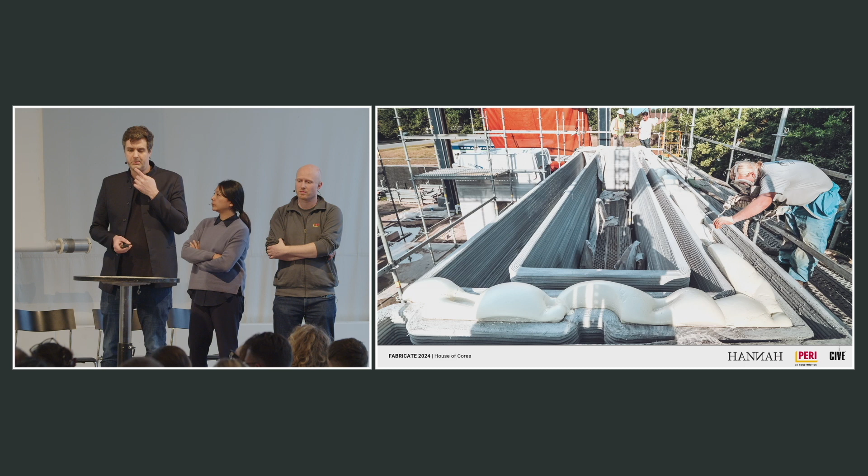The printed walls themselves are insulated using two new closed cell foam insulation system with a high recycling content from Huntsman Building Solutions. And that is then paired with an HVAC system to regulate interior temperature and air and moisture content. And so with the cores completed, we are about to start phase 2 of construction, which includes the conventional wood studs and trusses for the floor and roof slabs.

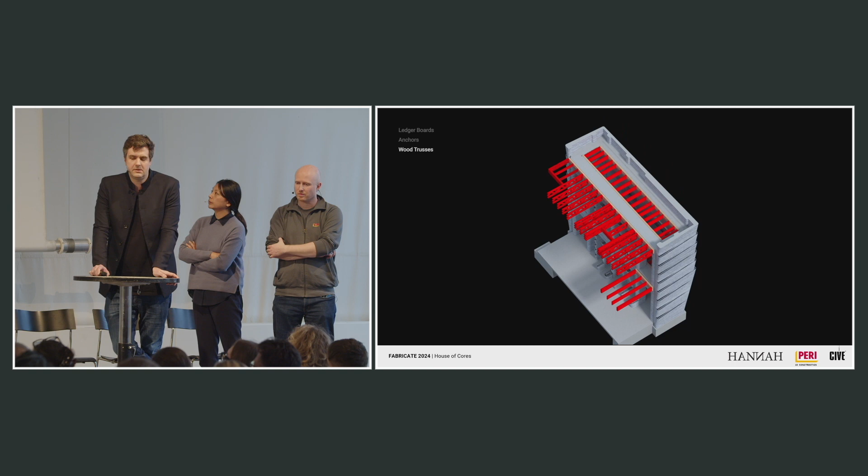And the floor and ceiling system consists of wooden trusses that are attached to the structure using ledger boards and joist hangers. So this is where the 3D printed structure interfaces with the more conventional building systems that we find in the US. And the aim of this project is to take advantage of both of these systems in this hybrid assembly.

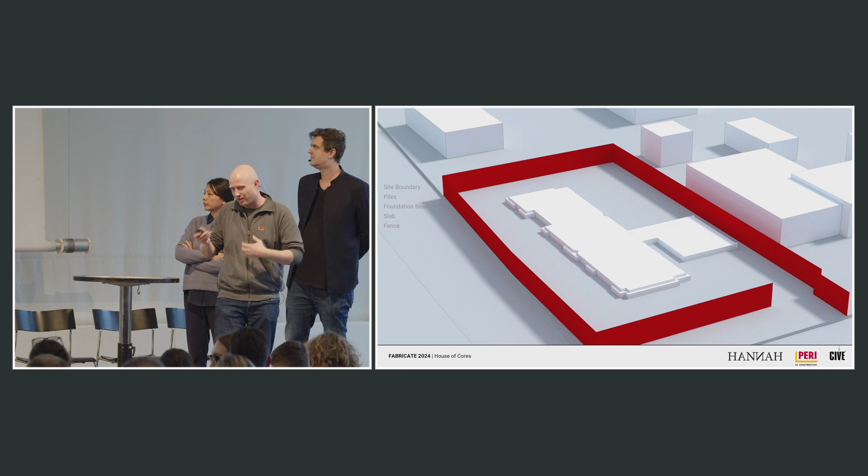And now from an industry perspective, what is always important to us in the end for the mass utilization, where most of the CO2 that we're talking about is being utilized, is in the end it's all about cost and time. So we weren't looking at creating a completely new process or a completely new computational model, but taking a lot of smaller incremental steps to bring down cost and time over the course of this project.

One of the core things here, it starts with the site. It's a very typical suburban lot, so it's very small and it's very long. So we had to make sure that everything is placed accordingly so that we have an efficient process down the line. I'll skip ahead slightly for the sake of time.

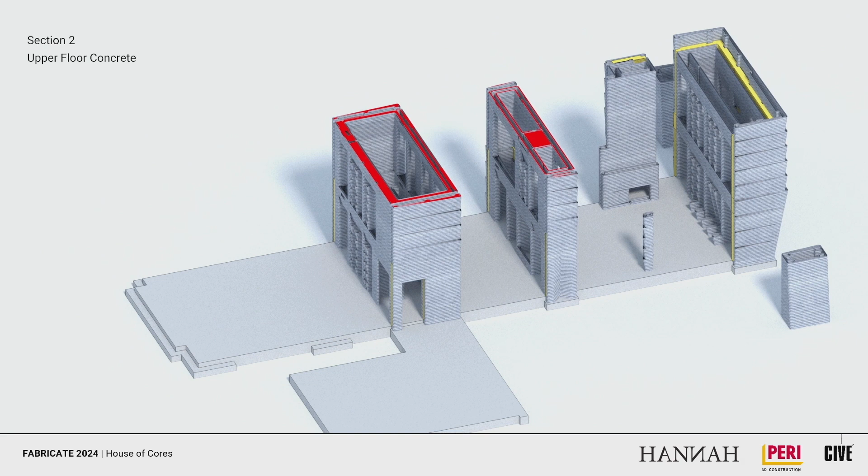So the building was printed in several sections. One section with the first core and a chimney that was also printed with precast pieces on site. And then the printer was actually increased in size for the next two sections that were printed afterwards. And between those sections, we always took a little bit of a pause to review and think about what had we done, what can we improve overall in this process. And there were a lot of things, but I just want to highlight a few of them.

One was that we had integrated a water chiller/heater to deal with the Texan heat and wind in particular. So for all of you guys that print indoors, if you go outdoors, it's a completely different ballgame. And that was a very important learning journey here. And how do we navigate that? How do we include sensors and cameras so that we can monitor everything on the fly, adjust it on the fly, don't have workers standing outside in the brutal Texan heat all the time, but have them nice and comfy in a site office.

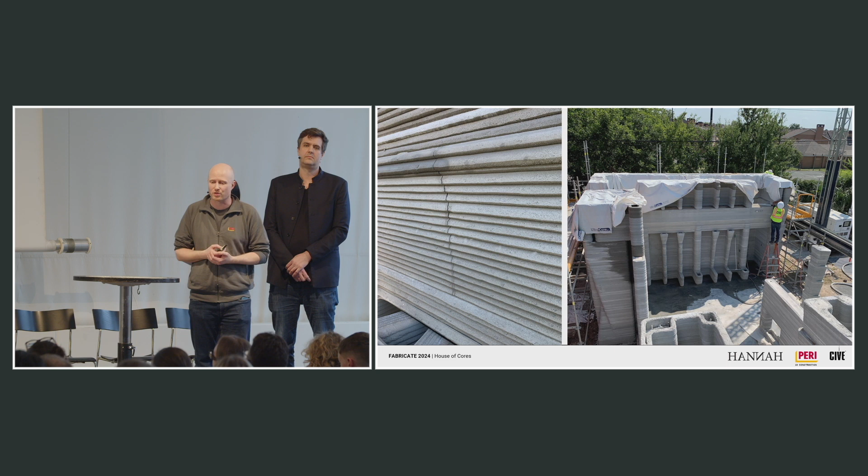Cracking is, for all of you that have printed concrete, an issue, but here we've dealt with it in several ways, where we included expansion joints that are very important in the 3D printed structure, as well as using different curing techniques, as well as, should a crack form after all, we had certain mitigating measures to ensure that the crack doesn't propagate through the structure.

Another point is the scaffolding. Well, if you go up 2 stories, you want to not just make sure about the stability, but also the safety of your workers. So you need to put up a higher scaffolding. Unfortunately, the scaffolding can also be in the way of your printer. So if the crew that puts up a scaffolding hasn't ever seen a printer before, they will 100% set it up in such a way that you cannot move your printer anymore. So a couple of iterations later, you will then have a scaffolding that you are actually able to use in a sensible way.

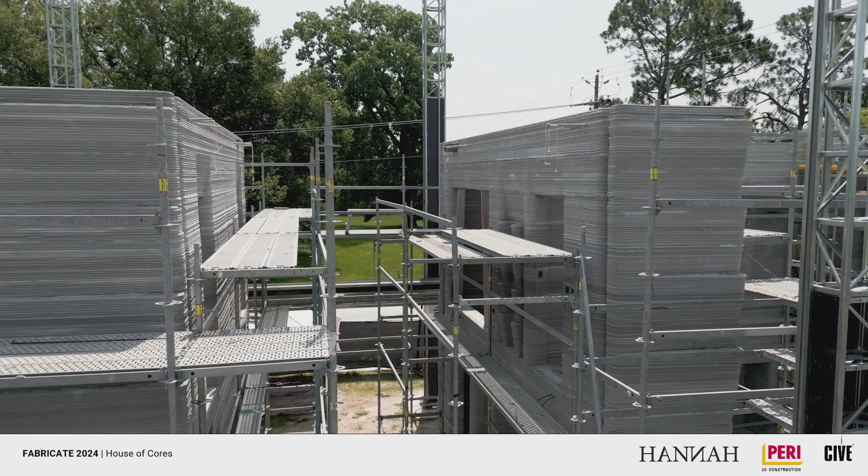And here we really highly recommend to not just model whatever you're printing and not just the machine, but everything that goes around it. If you use a ladder, put it in your 3D model. It will help you a great deal.

And so all of those strategies that we have implemented had actually led to an increase of productivity by a factor of almost 2, where initially in the first couple of months we had roughly 12.9 tons of material printed per week, and in the end it was 21.5 tons, always depending also on the other processes that we had around the structure.

And so to wrap up, we acknowledge that there are many more additional incremental steps that must be taken to advance our construction practices, especially in the context of sustainability, operational carbon, and embodied carbon. And developments are moving fast, and the House of Cores represents, for us, a small step toward more sustainable construction with concrete. First, the wall assembly in the concrete cores ensures no thermal bridging, as you can see in one of the images here, between the outer and inner print layers, and this results in a thermally efficient building envelope, which can then be flexibly adjusted to meet and or exceed building code requirements.

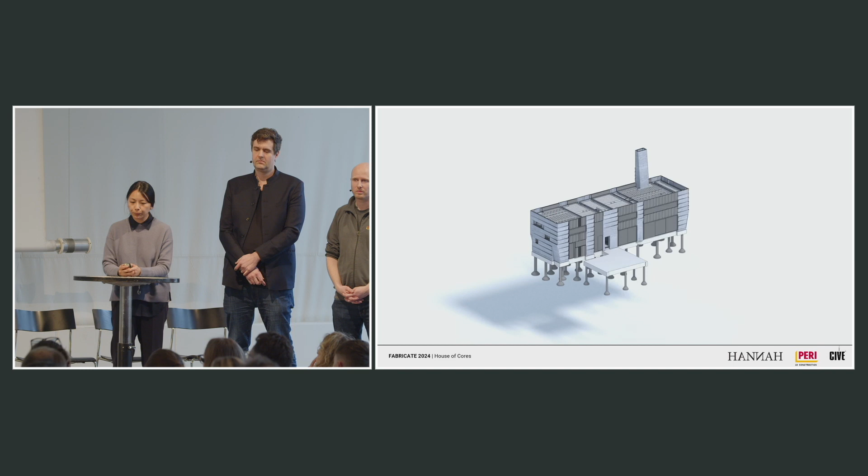And so third, and in a way lastly, we have to continue to ask ourselves, what do we print and what do we not print? And in this project, the use of concrete was limited to the load-bearing structures only, and emphasis was placed on the construction system's hybridity. And so this project was deliberately structured horizontally as opposed to a vertically integrated manner to bring in knowledge and expertise through the variety of stakeholders.

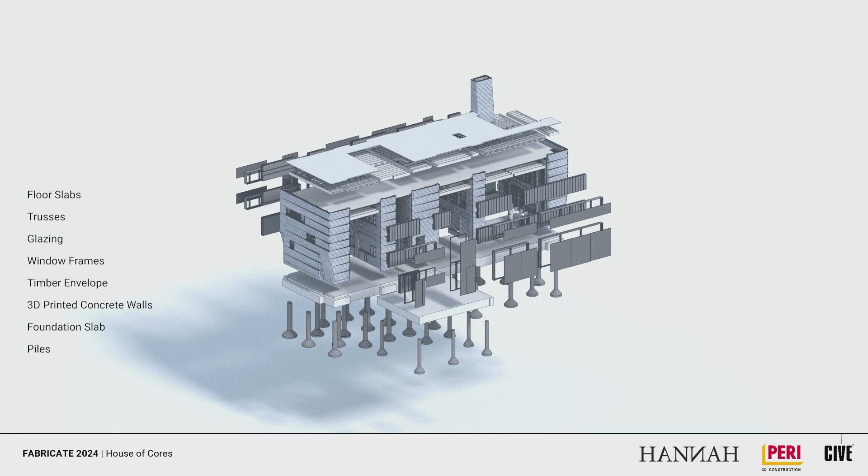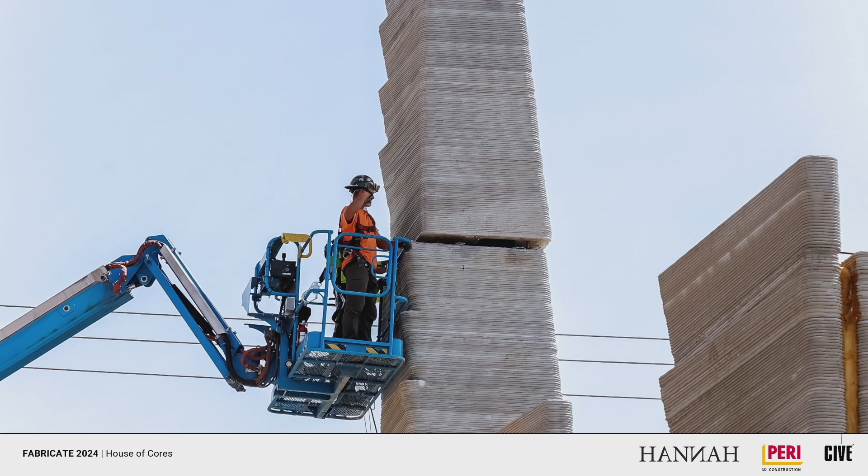However, there's a vast amount of smaller issues, and in particular, the integration of the various trades involved in the construction of a residential home is what currently keeps the construction industry from adopting these new digital fabrication methods for real impact. And so moving forward for us, we hope that the academic community could direct more emphasis to applied and holistic building process research for residential construction. So in simpler words, we have to get to the actual building.

And so together, House of Cores' varied design strategies aim to move the needle a tiny bit towards increased impact, applicability, and eventual cost efficiency of 3D printing for future residential multifamily buildings. Thank you.

So please join me in a round of applause for all of our amazing presenters. And I'd like to invite everyone up to the stage. Need one more? Okay. There we go. All right, so we've come to our Q&A session. And I have a few questions to kick us off, but I'm sure the audience also has a number of questions.

I couldn't help but notice the suburban Houston context surrounding House of Cores. And maybe the first question I'll kick off with is, how do all of you and your work manage standardization versus customization, and how does that impact or benefit or perhaps hinder your collaborations, as well as identifying resource efficiencies? I can start, maybe.